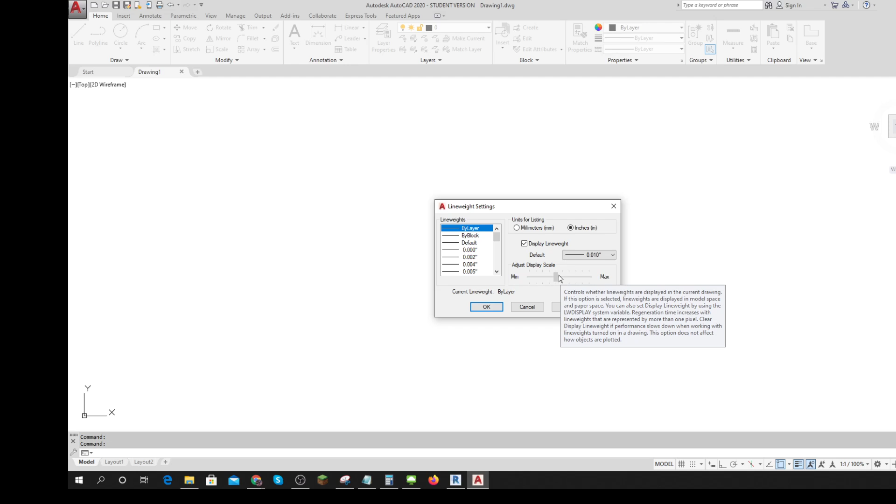Once it's on there, you click on it and right click, and you open up this thing that says line weights and make sure you're looking at inches. And this adjust scale should be somewhere in the middle. Don't do it with me, just watch.

Okay, now each layer has its own line type and line weight. So I'm going to make a new layer.

You'll see this layer, it says it's named 0. It has a color, it has a line type, and it has a line weight. So I get to set each one of those every time I do a new type of line.

So if I want to draw a new type of line, I make a new layer and give it its own color. I'll make this one blue just for fun.

Then I have to give it its own line type, so I have to click on its line type. Right now it is continuous. So if I want to change it, I have to click on it, and then load the type that I want.

I know, I'll get there, but I'm going through the whole thing for you so that you're at the right spot. So I'm going to make this one center 2, and I click it so it is center 2.

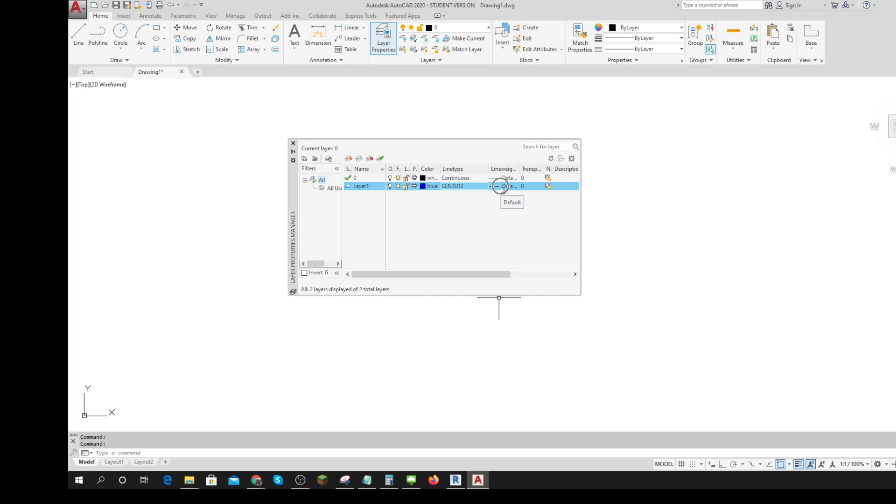Okay, now I have to set the line weight also. Right now it says default and I don't know what that means, so I have to come and make it something else. I'll make it kind of thick, 0.028, because I'm in inches.

There. And now, whatever line I'm going to draw on, there it is. I'm going to draw my line. And there's a line. Okay.

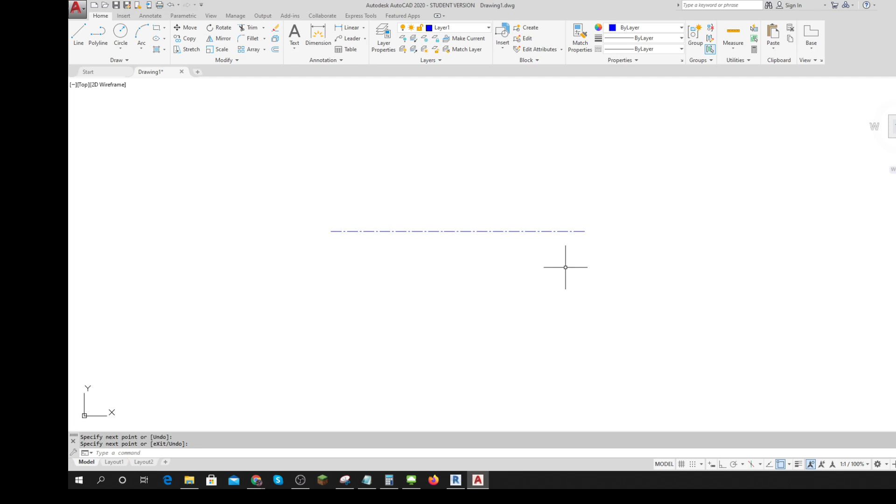Well, I'm going to show you right now. My line weight tool that says show or hide line weights says it's off. So if I turn it on, it looks thick.

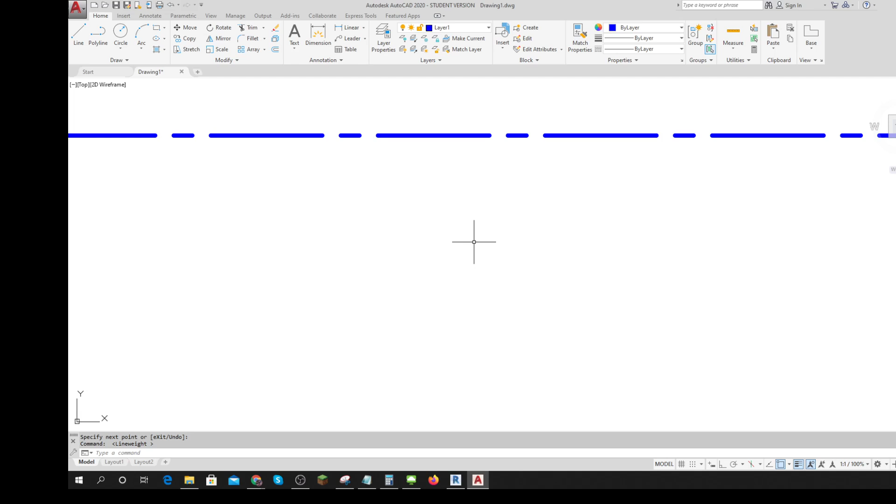Now the problem is it's so thick that it gets all blurry. So it's too thick. Let me change it to be less. Try 0.014.

Now when my line weights are on or off, it kind of looks right. So you have to control whether line weights show on or off. You have to control what layer it's on. And from the layer, you set how thick it actually is when it's on, what line type it is, and what color it is.

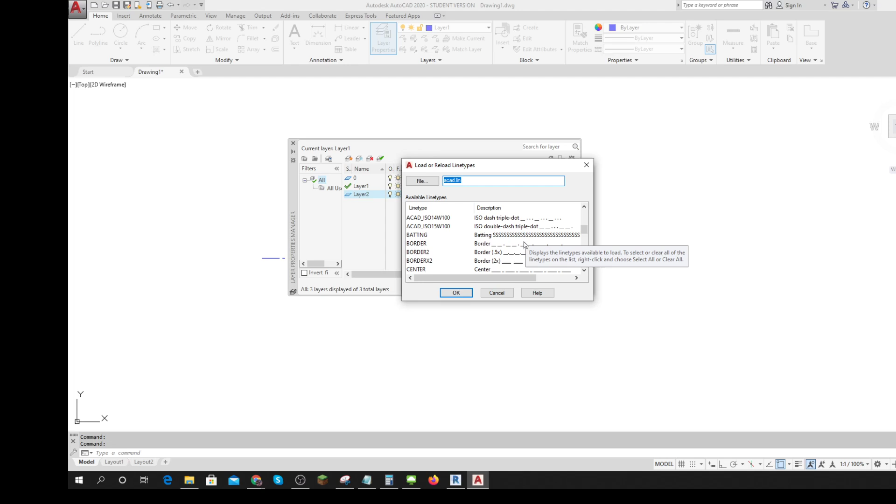So I'm going to do one more for you. New layer, I'll make it a new color just to make it easy to see. I'm going to make it a new line type, and a new line weight, 0.010.

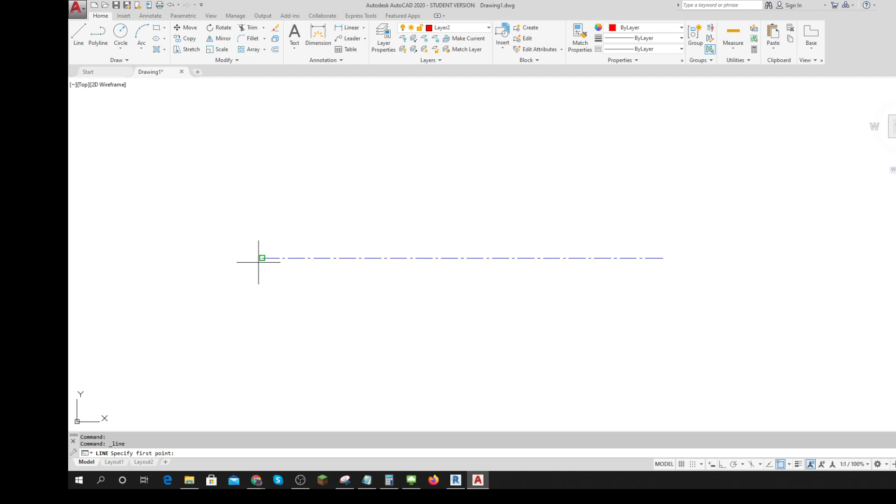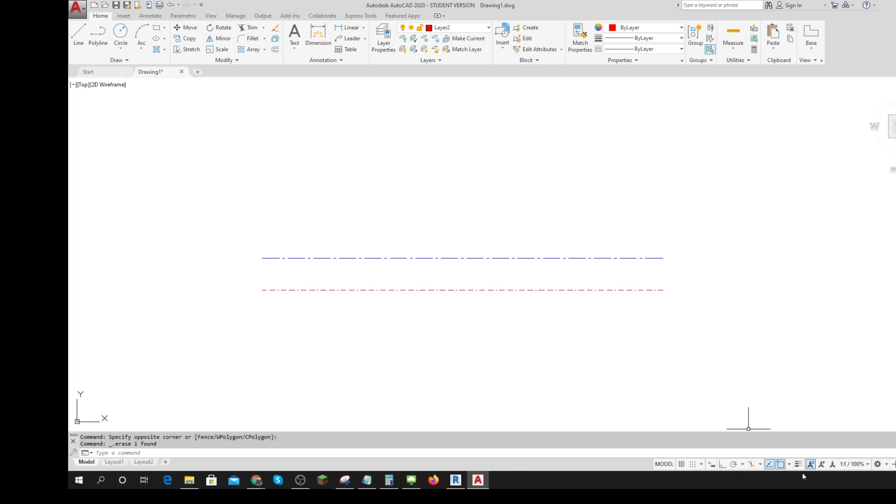And I'll make that current, so I'm drawing on it. I'm going to draw on it right here. And to make the line weights show, I click the line weight button.

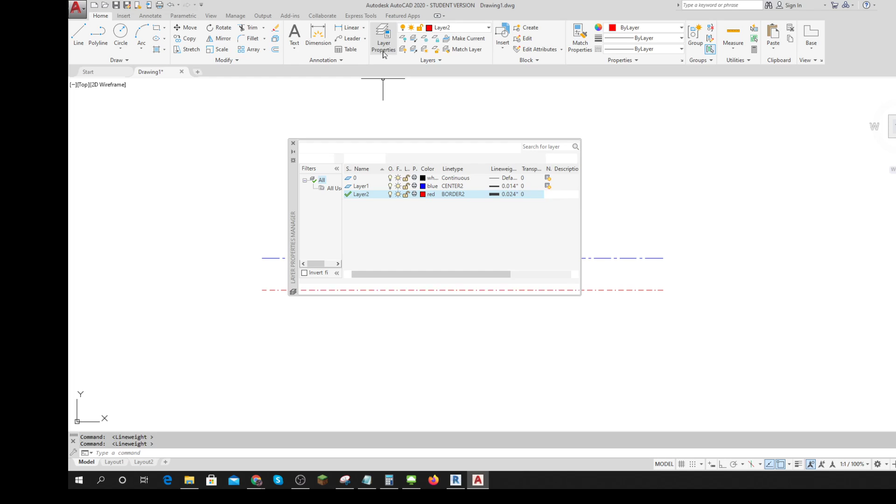Now that one has a pretty thin line weight, so I can make it thicker. Okay, so you have to play with a few different things to get it to look like what you want. That looks pretty good, doesn't it?

Okay, so you got all those parts. So I'm going to stop the recording.